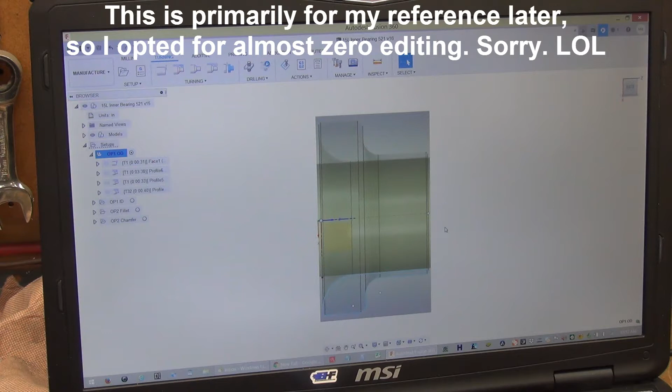I'm going to run through it here for speeds and feeds. I may decide to just post this part of the video. Otherwise, it'll be reference for me for later to be able to go type them back in.

So the facing cut. The facing cut, I'm running at 900 RPMs. It's a facing cut, none of the faces left, so there's no real need to use constant surface feet. And constant surface feet, on big changes, the RPM changes so much, it takes time for the spindle to slow down and speed up a little bit going between the passes. If I could get it to change that speed only as it runs in, and anyway, blah, blah, blah. So, spindle speed at 900.

The cut is 9 thou per rev. My lead-ins are right around 40 thou just to make things faster. And the step over is 8 thou. And I'm running 3 of them.

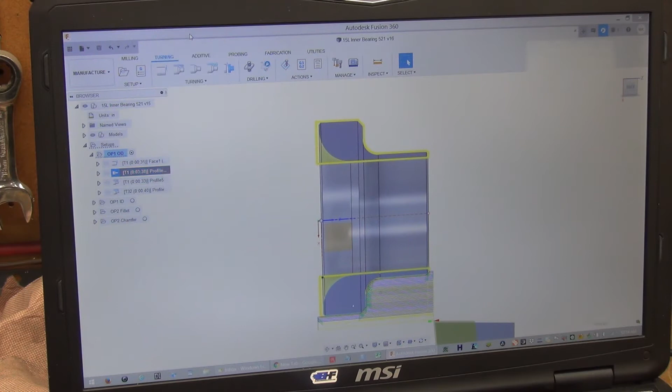Okay. So then for the profile, this is the roughing cut. And I added a lot. I was a lot more delicate with it earlier. And, you know, I was pretty happy when I got it down to like a 6-minute cycle time from a half an hour. So I'm real pleased now that it's down to just under 5 minutes. It's like 4 minutes 56 seconds.

So I'm running 1,000 RPMs. I manually went in and changed it in the code to go 1,100 about here and 1,200 about here. It saves a little bit. If I repost this code, I lose that. I got to go back in. It runs just fine at 1,000.

Its surface feet, when it starts out here at the biggest diameter, is 500 something, 560 roughly. And then as it goes in, it drops all the way down to like 350, which is why I picked it back up a bit. Anyway, so the cut is 13 thou per rev.

And here's the roughing passes. The step down is depth of cut 14 thou. The roughing overlap 7 thou, which is, I just go with whatever it automatically sets. I don't care about that. I told it to use pecking. The pecking depth is 65 thou, and the retract is 8 thou.

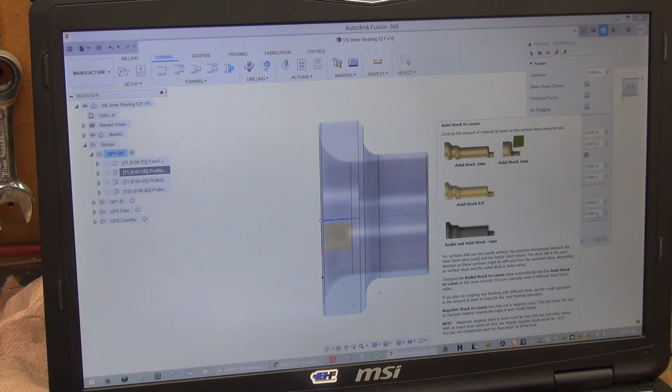Stock to leave is 8 thou and 6 thou, and I use this to regulate the depth on the next cut, because whatever I tell it to leave here is how much it cuts on the next one. So we'll cancel that. Let's go to the next one.

This is the profile. This is a single pass. Surface feet. I do this one with constant surface feet because it runs in one continuous pass all the way through. Whereas the other one, since it goes in and it cuts and it backs out and goes over, it would constantly change the RPM a lot, all the time, on the roughing pass. So I just set it at a certain. Anyway, so this one is constant surface feet.

I have it at 450 feet per minute. That seems pretty nice. I'm sure I could run it faster. I was running it slower, not getting as nice a surface finish. So you can go too slow when cutting with carbide.

So maximum spindle speed's 1,500, just because I didn't want it to run away to 2,000. If I decide to change this surface feet to 500 or 550, I don't have to worry about it running that up and spinning it too fast. 1,500 is all I'm comfortable with. So feed per revolution is 8 thou per rev.

And then when you come in here, number of step overs 1. Now I told it step over of 10 because I know that it's only leaving 8 thou, because that's what I told it to leave on the last one. If I told it to do a step over of 8 thou here, depending on exactly how much material was left on the roughing passes, it would affect this, okay? Then I'd have to mess with 2 of them.

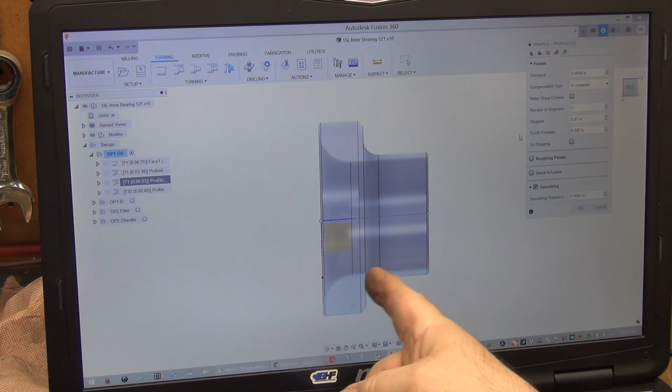And then with the stock to leave, that also played with that shelf there, and I could vary how thick that cut is. Because if I told it step over of 10, it's going to try to take 10 on that shelf cut. And because of the way the tool is, that's where the 5-degree edge is, something like that, 10-degree. It's not as optimal as it is on the flat surfaces.

Anyway, so the finished feed rate is 6. I had that at 3.5, and that's what I was saying earlier with it wasn't quite as nice. Once I bumped it up to 6, it would allow the cut to shear off instead of rub, basically, and came out way nicer.

So, and then for the inside, I'm running that at a constant 1300 because there's no reason. The cuts are within a few thou of each other. There's no reason to change the speed for the retract and stuff like that. So spindle speed 1300, cutting feed per revolution 6 thou.

I had this at 3.5 for a lot of them, and it was really nice, but this was the roughing pass, and I was like, okay, I'm wasting time here. I don't need to do 3.5, and that just causes a little bit more wear and rubbing on the insert. So 6 thou here sets up the roughing pass, and then the roughing pass, I told it maximum 25 thou, and let it automatically set the overlap.

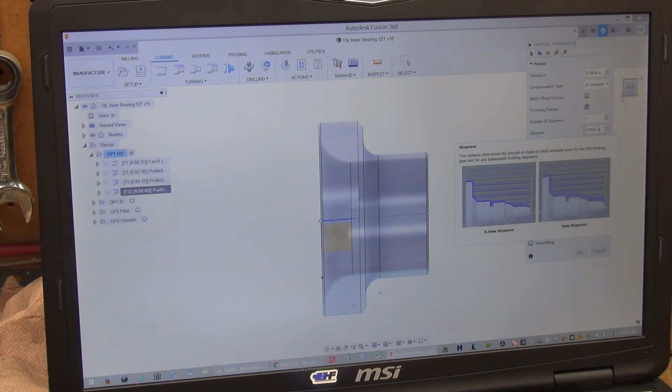So the step over for the finish pass, one finish pass, 3.5 thou. The triangular insert seems to like that better. The tip geometry is different than the 80-degree diamond. Is that what that one is? So for the finish pass, it's coming out beautiful. I already showed it in the video.

So finish feed rate of 3.5, and the step over is 3.5. So this sets the thickness. This just takes everything else. The roughing step down takes everything else besides that 3.5. And the finish has been so nice.

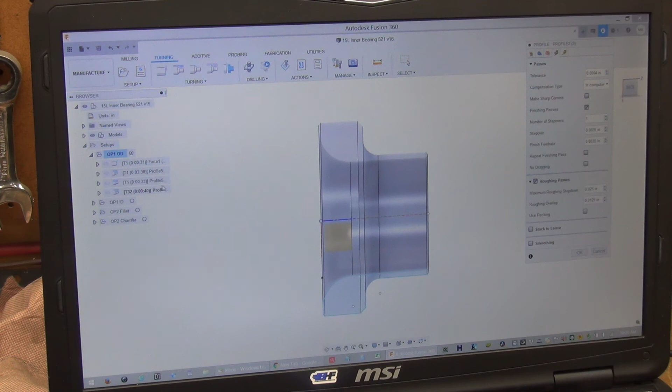It's only a 40-second cut for the roughing and the finish, so I just haven't seen any reason to really change that, push it, anything like that. What am I going to save? 5 seconds, 10 seconds maybe? Just not worth it. So that's pretty much it.